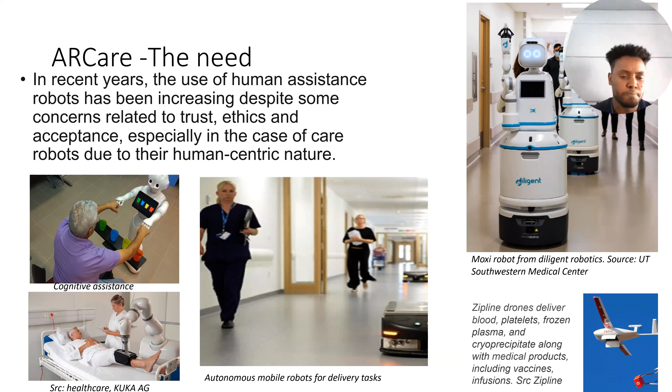Beside all these needs and applications, current robotic assistive methods exhibit limitations in efficiency, particularly in applications involving humans and robots, highlighting the need for improvements. Unlike industrial robots, which operate in structured and less dynamic environments, in assistive caregiving robots must possess advanced skills to understand humans and interact effectively with both humans and the environment.

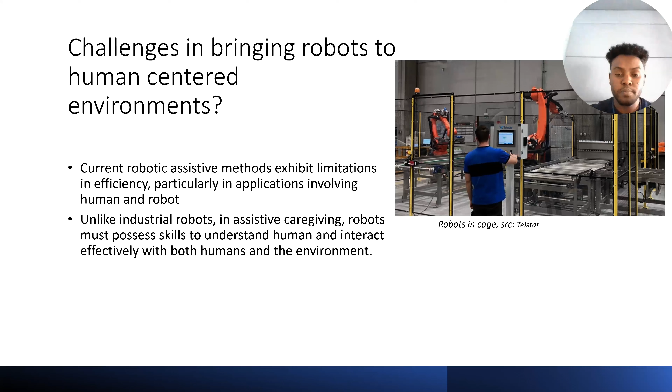Okay, maybe I have to put the pointer, laser pointer. Okay, can you see my laser pointer? Yes, okay, thank you.

In the industrial environment, robots are less intelligent in understanding their environment, and they function in structured, less dynamic, isolated environments. They need to be fenced and kept away from humans, requiring some predetermined or predefined static environment, maybe with installed sensors, markers, and other infrastructure. Unlike self-driving or autonomous cars, which operate in roads and infrastructure built for humans, these robots need their own environment and cannot be operational alongside humans. That is the industrial environment robot.

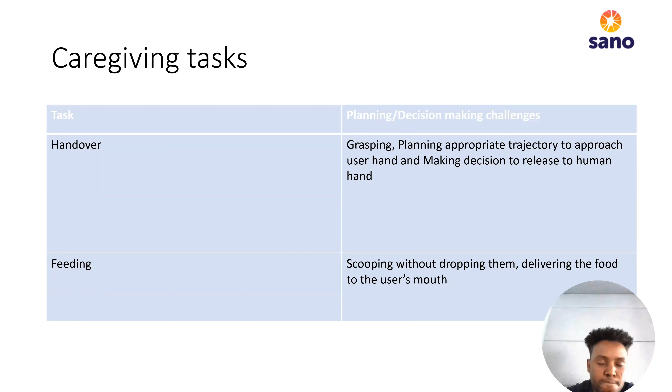Mainly using these methodologies: one approach uses classical planning methods such as A-star or random trees to find a plan or solution in a space, a Cartesian space, that takes the robot in a vector from some initial position to the desired position. This classical planning approach uses traditional AI planning techniques to determine a sequence of actions that the robot should take to achieve its goal.

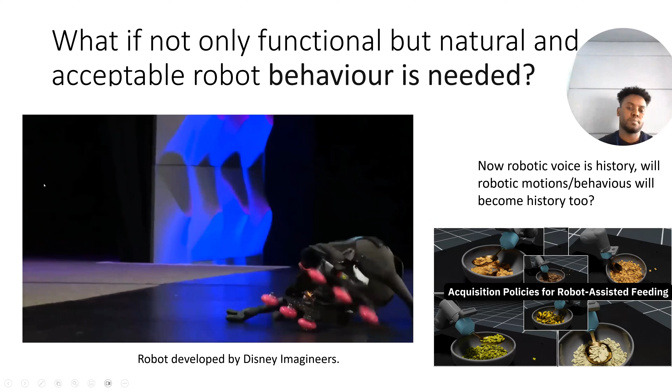It's hard to program or achieve these kinds of motions any other way. It's super smooth and so natural, acceptable.

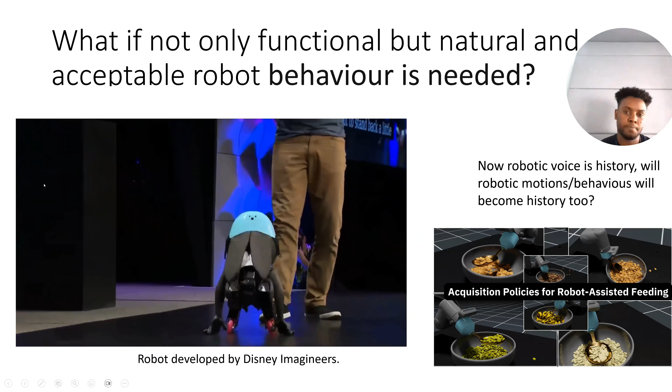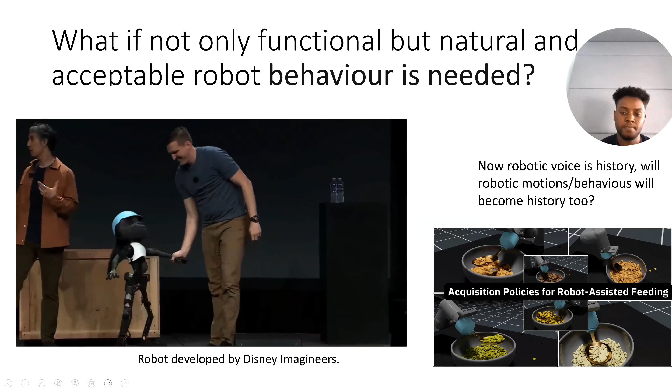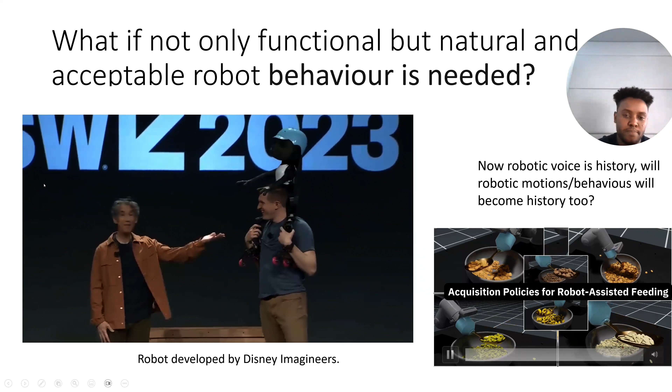So, can we achieve some kind of acceptable and smooth behavior in robots? This takes us to imitation learning, where a robot learns to imitate human behavior instead of being programmed or learning some weird, strange, or random functional behaviors guided by a reward function.

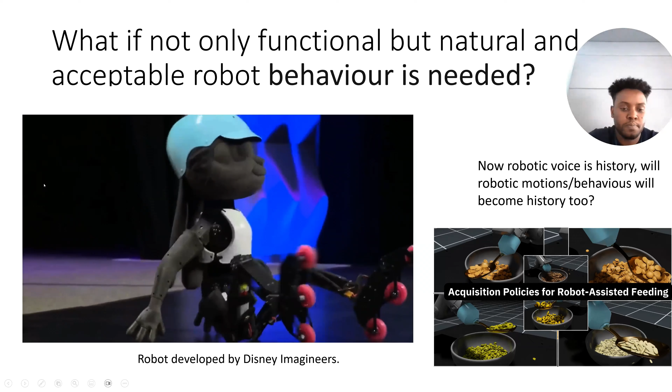Imitation learning involves learning a policy by observing human demonstrations. Instead of exploring the environment through trial and error like in reinforcement learning, imitation learning leverages existing expert knowledge to directly mimic experts or human behavior. Imitation learning can be particularly useful when it's difficult or time-consuming to manually engineer a reward function, or when the task involves complex behaviors that are hard to capture with explicit reward signals.

Imitation learning, despite its promises, faces some challenges, including its need for high quality demonstrations and distribution mismatch, since the states of the either the environment or the robots are not deterministic, and it drifts continuously, and this causes the learned agent policy to perform poorly on unseen states.

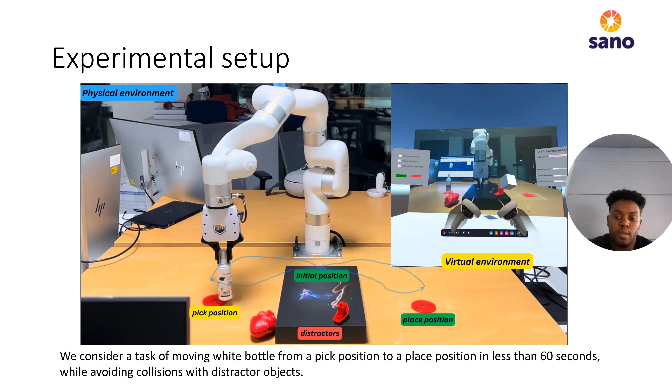And success rate is a percentage of successful tasks among trials, defined by accurate picking from the red radius on the left, and precise placing within the red circle in the place position. All this accomplished in less than 60 seconds. If not, that means the task failed.

In the first two scenarios, human pass-through and human teleoperation, the user performs the task using teleoperation and pass-through mode as described previously. In a third scenario, the robot autonomously executes the task without human intervention, termed pure agent. In the last scenario, the robot's execution is supervised by a human operator, allowing interventions when necessary, such as in the event of failed grasp or failed robot execution. We call this HiLoTEL, human in the loop.

For each scenario, the user performed 15 trials. We evaluated this framework in terms of two things: interaction and human-robot collaboration.

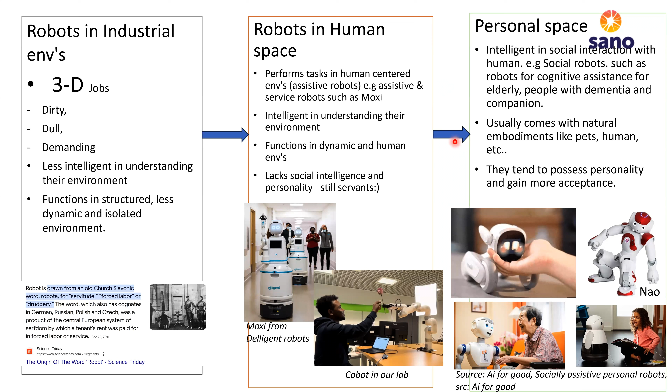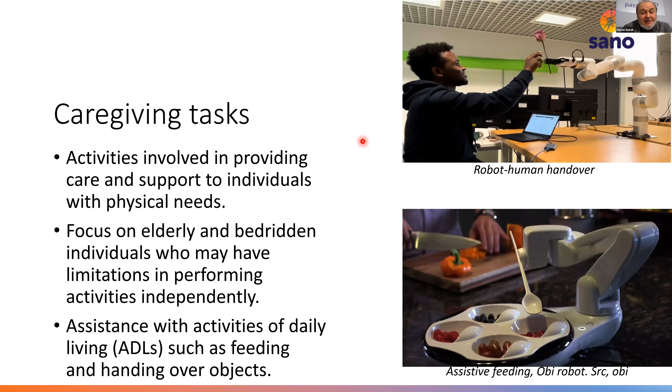Okay, could you repeat which robot you said, which slide maybe? Well, no, what I'm asking about is because you presented the results in the form of robots moving, and I think that behind this there is a kind of work in finding the best possible algorithm and programming. So could you give some comments on this type of work?

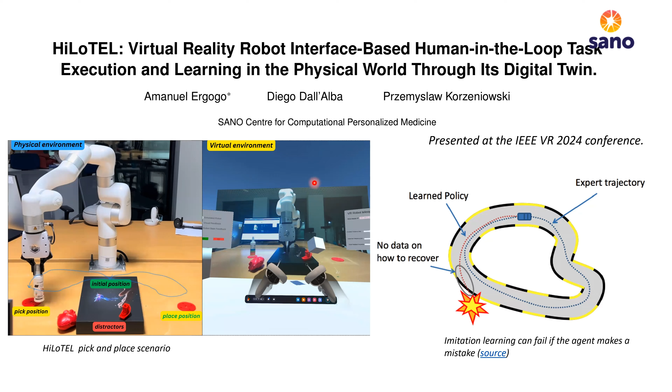Yes, so in this work, basically my contribution with the rest of the authors is that I was able to develop a framework, an intuitive framework, as I've shown. This was the main challenge: to capture high quality demonstrations. Using virtual reality, I was able to develop this virtual reality based framework for a human to intuitively interact and show the robot, in short, to interact with the robot. On top of that, I was also able to add some machine learning models to capture these interactions with the environment, human interactions with the environment while the human is doing things or executing some task, as we have discussed. The method is called the task execution and learning method. This method can learn these interactions. Those are some of the contributions.

Yep, thank you, thank you. And if you compare the approaches used in the models, in the robots you presented at the beginning of your talk coming from outside, what is the novelty in your approach? What is new with your proposal? I couldn't grasp which robot you're talking about. Are you talking about this slide maybe?

Sorry, yes. So what is the novelty of your research in comparison to this? Okay, in this slide, what I was trying to say is I was trying to introduce imitation learning. That's not anything novel, but we have some tasks in progress, as we see here: acquisition policy for robot-assisted feeding. That is what we are doing. That's something in progress, meaning for robots to be able to acquire different kinds of food, various food types, to help patients in need, to assist with feeding. So in this one, we are trying to achieve some kind of natural and acceptable motion using imitation learning from humans. So this is still an ongoing thing. Yeah.

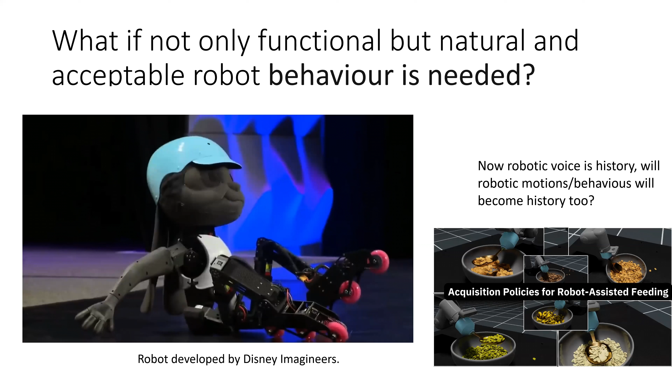Oh, fantastic. First, I'm happy seeing the names on the first page. I have seen my old friend, Professor Teresa. I'm not quite sure if she is online. If she is, I'm saying hello. Yeah. Okay.

Regarding this work, I think it's a very nice topic, a very important topic. I would say that probably the state of the art shall be a little bit extended, because we know there are several robots in surgery performing different tasks, like Neuromate, probably the first robot in neurosurgery, which has been used mostly as a positioning device, or another popular robot, Da Vinci, for scaling motions or transferring motions. So I think it's good to extend the state of the art.

Of course, from the point of view of avoiding obstacles, we know there are robotic games, playing soccer and so on. So I think it's also a good idea to look at this kind of application, because the issue is not only avoiding obstacles, but also doing it very, very fast, without mentioning robots used for cleaning, which really are wonderful at avoiding obstacles.